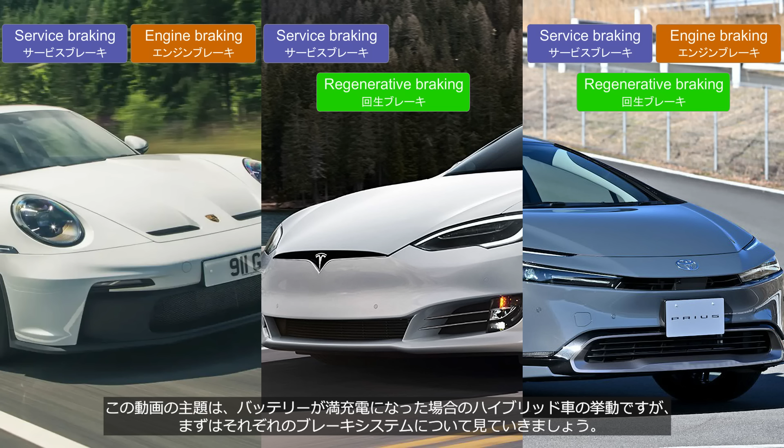The main topic of this video is how a hybrid vehicle behaves when the battery becomes fully charged. But first, let's take a look at each of the braking systems.

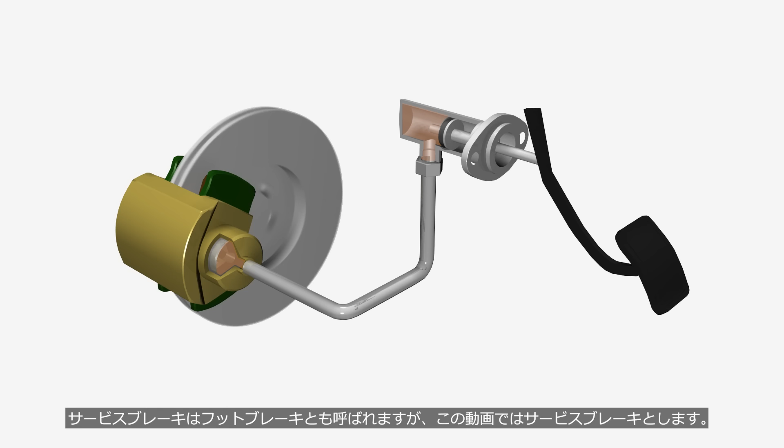The service brake is also known as the foot brake, but in this video we will refer to it as the service brake. This system converts the force applied by the driver on the brake pedal into hydraulic pressure, which then presses the brake pads against the brake discs rotating with the wheels, slowing the vehicle through friction. From a physical perspective, the kinetic energy of the moving vehicle is converted into thermal energy by the brake discs and pads, which is then dissipated into the atmosphere. In other words, the vehicle slows down by discarding the energy it gained from burning fuel to accelerate.

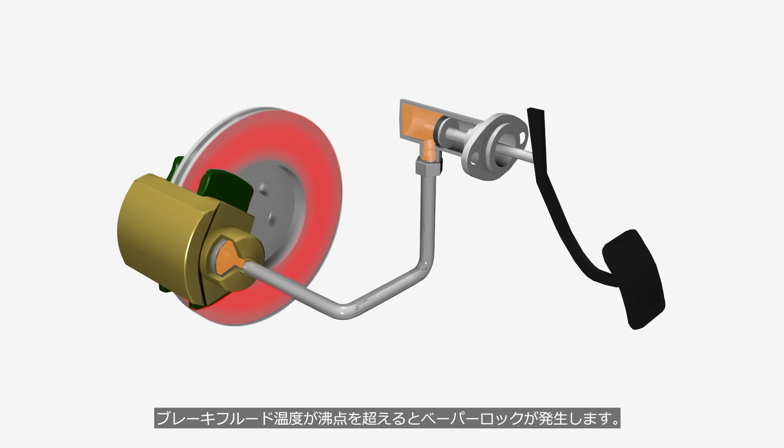The driver can easily control the braking force by changing the pressure on the brake pedal. One of the main issues with the service brake is the buildup of excessive heat. When the brake pad temperature exceeds 300 degrees Celsius, brake fade may occur. When the brake fluid temperature exceeds its boiling point, vapor lock can occur.

Brake fade is a phenomenon in which overheating of the brake pads causes some of the material on the pad surface to vaporize, forming a gas layer that reduces the coefficient of friction and weakens braking performance.

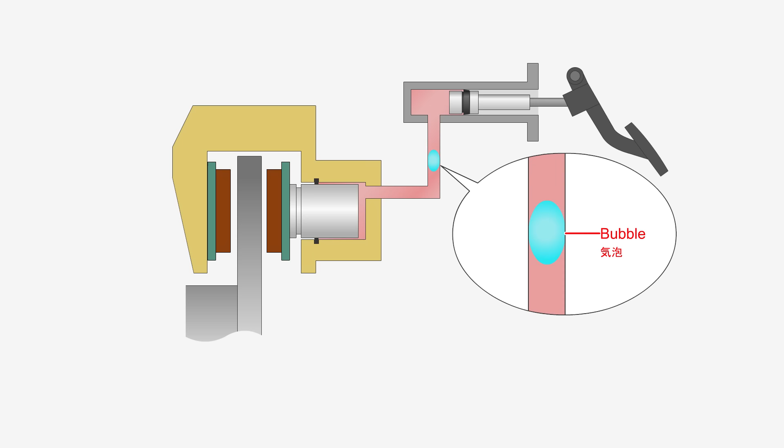Vapor lock is a phenomenon where heat is transferred to the brake fluid, causing it to reach its boiling point and form gas bubbles within the brake lines. Liquids cannot be compressed, but gases can be compressed. As a result, the force applied by the driver on the brake pedal is not transmitted to the brake pads, and the brakes become completely ineffective.

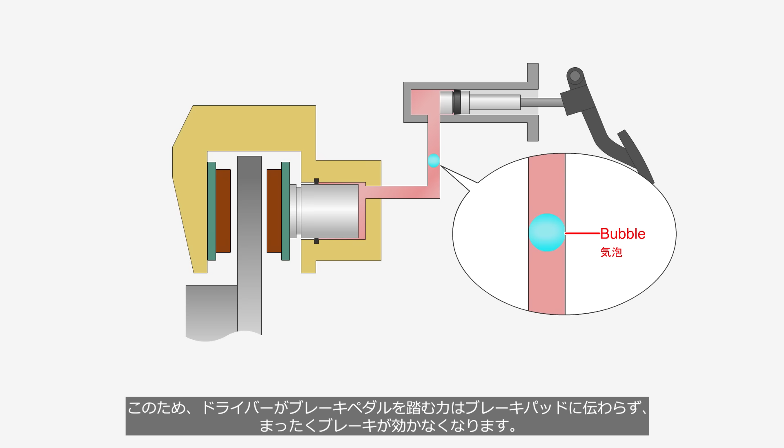For these reasons, especially when descending long mountain roads, the driver needs to be cautious to prevent the brakes from overheating.

Simply put, engine braking consumes the vehicle's energy by making the engine operate as an air pump. Engine operation is divided into the intake stroke, compression stroke, power stroke, and exhaust stroke. When the throttle valve is closed during the intake stroke, a large amount of energy is required because the engine must draw air through a narrow passage.

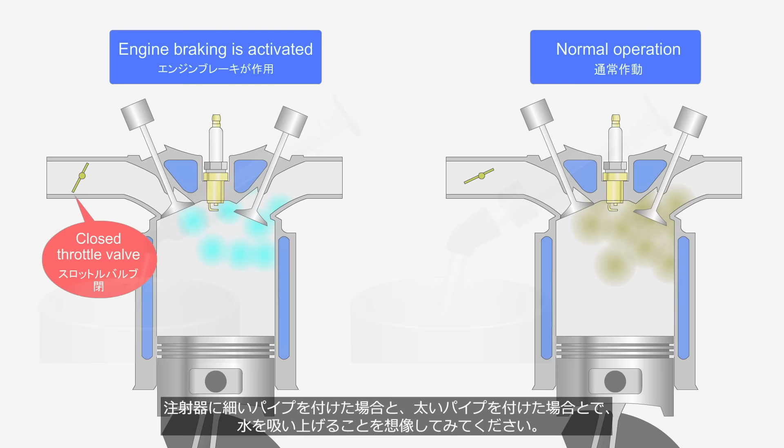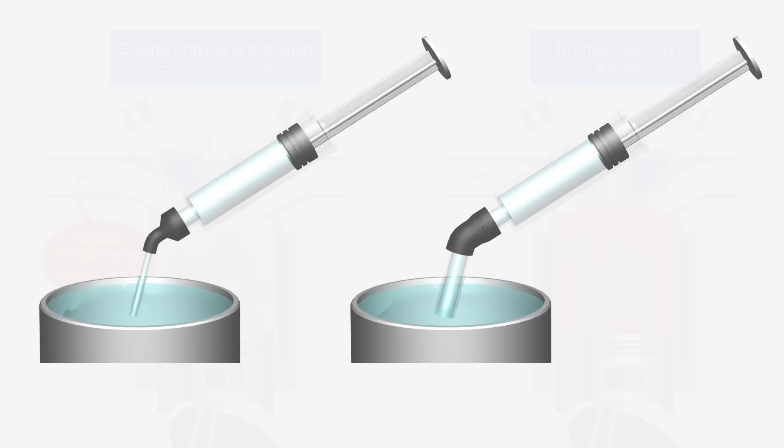Imagine trying to draw water with a syringe, once with a thin tube attached and once with a thick tube - the thin tube requires greater force. As a simple calculation, a 2.0 liter four-cylinder engine running at 3,000 revolutions per minute requires each cylinder to draw in 500 cc of air in just 0.01 seconds. This requires considerable energy, and engine braking uses that energy to slow the vehicle down.

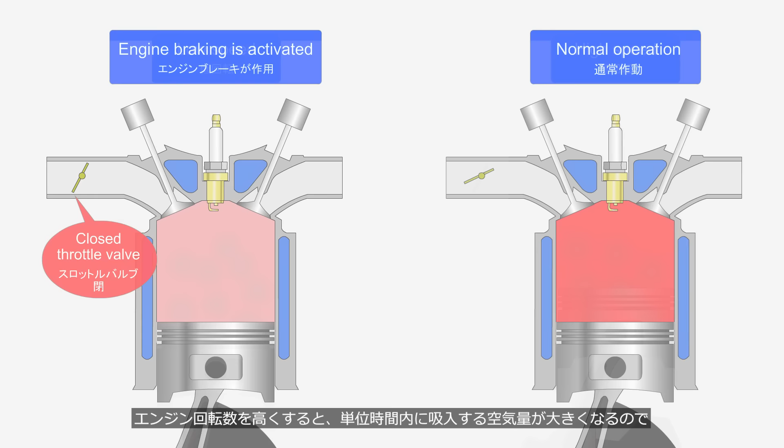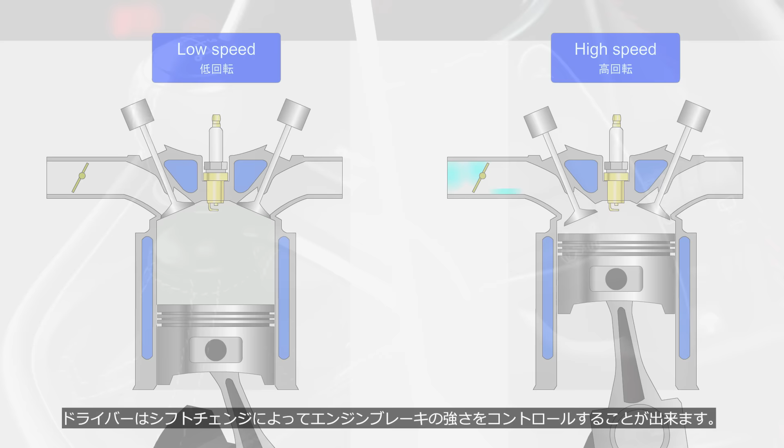When engine speed is increased, more air is drawn in per unit of time, which requires more energy and results in stronger engine braking. For this reason, the driver can control the strength of engine braking by shifting gears. However, since it merely moves air from around the air cleaner inlet to the exhaust outlet, it doesn't generate anything.

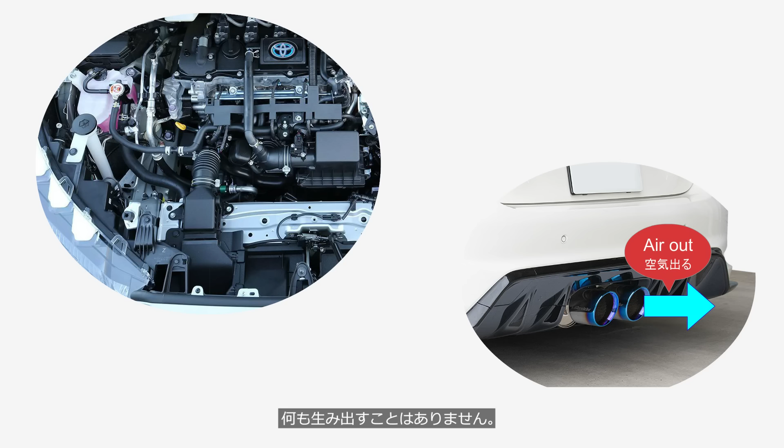The regenerative braking used in electrified vehicles, including battery EVs and hybrid vehicles, is highly efficient in terms of energy utilization. An electric motor generates rotational force when electricity is supplied to it.

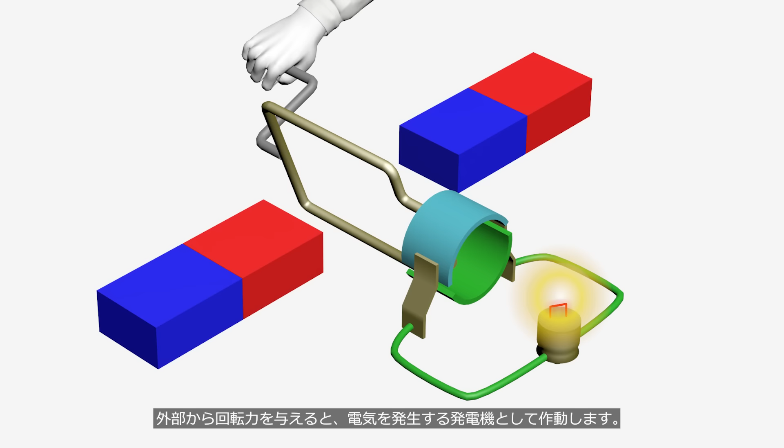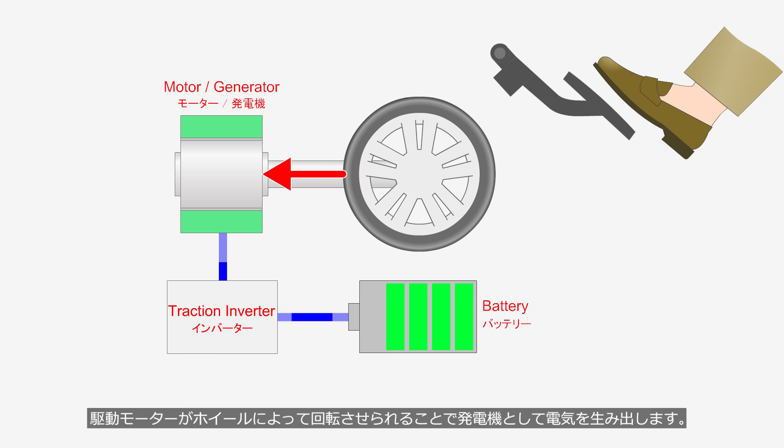When rotational force is applied to it from an external source, it functions as a generator that produces electricity. In electrified vehicles, the drive motor rotates the wheels using electricity either stored in the battery or generated by the generator during driving. When the driver releases the accelerator pedal or depresses the brake pedal, the drive motor is rotated by the wheels and functions as a generator to produce electricity.

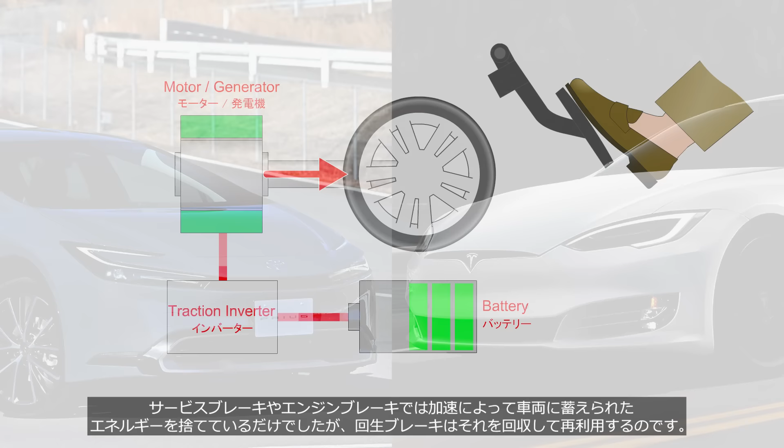The electricity is stored in the battery and used to power the drive motor during acceleration. While service braking and engine braking simply discard the energy stored in the vehicle during acceleration, regenerative braking recovers that energy and reuses it. For this reason, regenerative braking helps extend the driving range in battery EVs and improves fuel efficiency in hybrid vehicles.

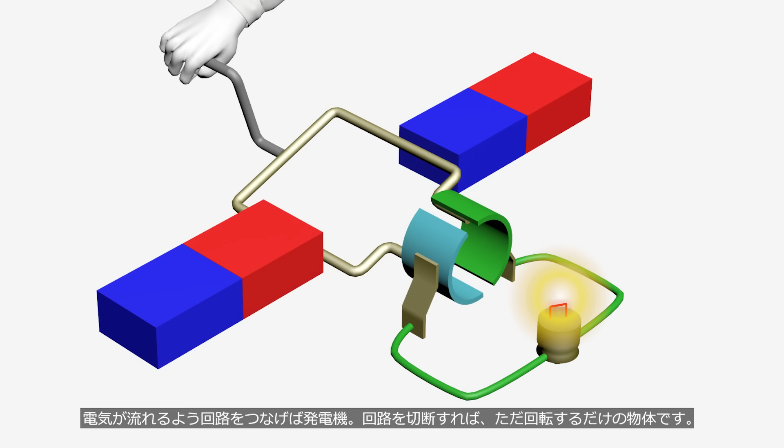For an electric motor to operate as a generator, electricity must flow through the motor. If the circuit is closed to allow electricity to flow, it acts as a generator. If the circuit is broken, it's just a rotating object.

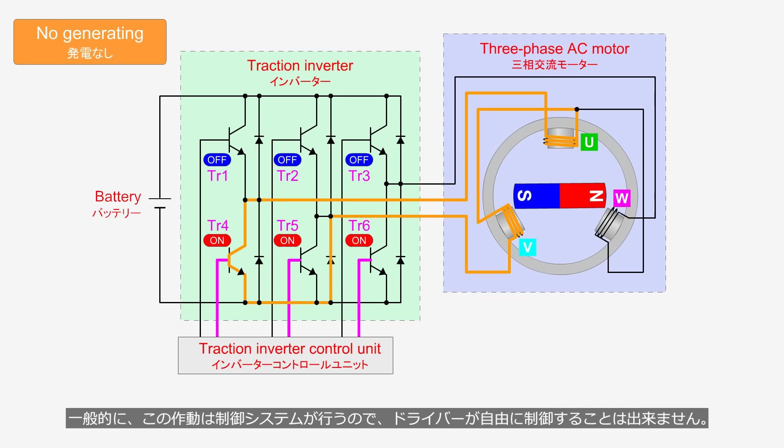In electrified vehicles, the traction inverter controls the electricity flowing to the motor to adjust the braking force. Generally, this is handled by the power unit control system, so the driver cannot control it freely. However, some models are equipped with a feature that allows the driver to adjust the strength of regenerative braking using paddle levers located behind the steering wheel.

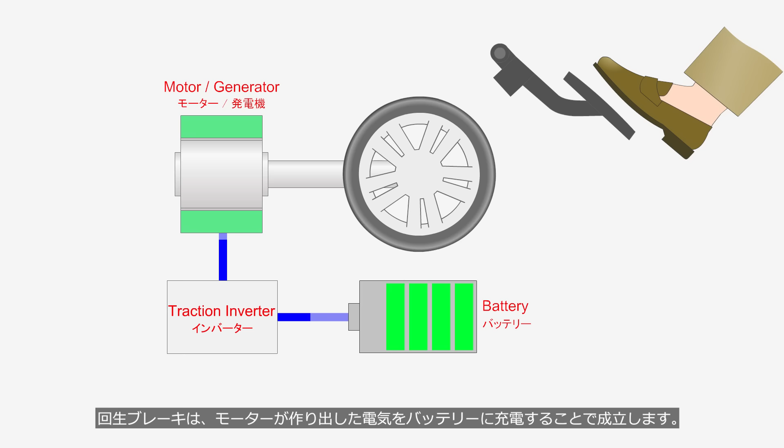There is a problem. Regenerative braking works by charging the battery with the electricity generated by the motor. What happens if the battery becomes fully charged? In hybrid vehicles equipped with only a small capacity battery, this situation can occur when driving down a long mountain road, for example. At such times, the power unit control system uses engine braking.

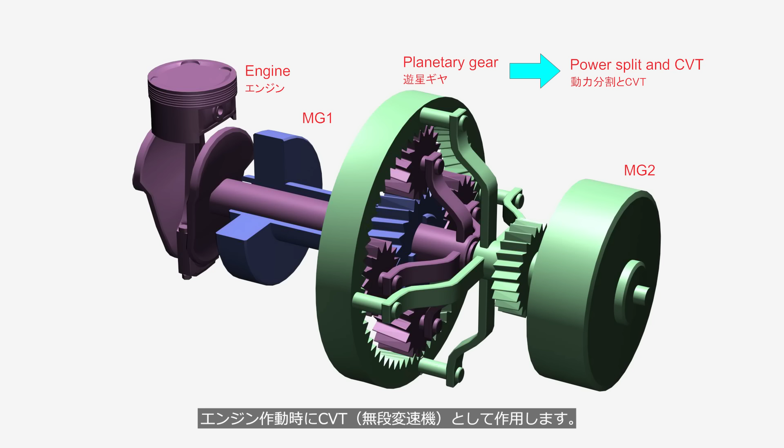Let's start by taking a look at how Toyota's power split hybrid system works. Depending on the market, it's called Synergy Drive or THS2, but essentially, it's the hybrid system used in the Prius. This system consists of an engine, a planetary gear set, motor generator 1, primarily responsible for generating electricity, called MG1, and MG2, mainly responsible for driving the wheels. The planetary gear set serves to split and combine the driving force from the engine and two motors, and also functions as a CVT, continuously variable transmission, when the engine is driving the vehicle.

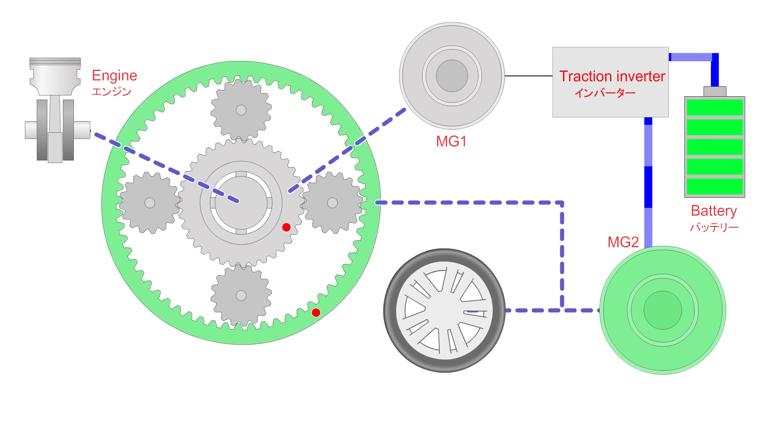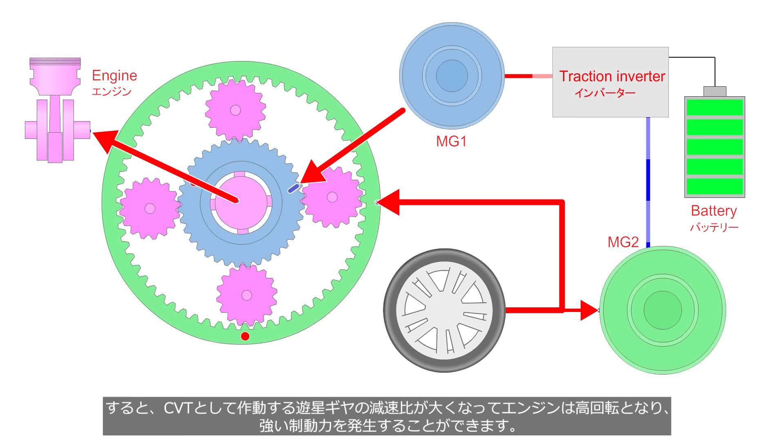When the battery becomes fully charged, MG2 operates as a generator, and the electricity it produces is used to run MG1 as a motor. As a result, the reduction ratio of the planetary gear set, which functions as a CVT, increases, causing the engine to rotate at high speed and generate strong braking force.

When driving down a long mountain road, the control system automatically starts the engine once the battery becomes fully charged. Since only the sound of the motor had been heard until then, drivers who aren't well versed in the system may be surprised when the engine suddenly starts running.

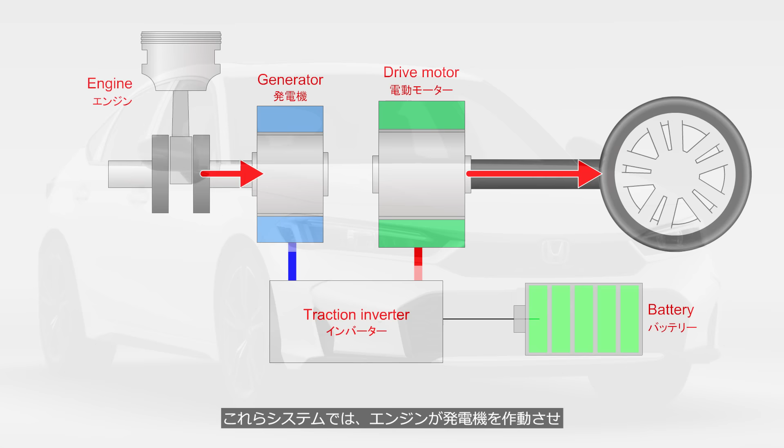Honda and Nissan have adopted series hybrid systems. In these systems, the engine operates a generator, and the generated electricity powers a drive motor that drives the wheels. Therefore, the engine and the wheels are not mechanically connected.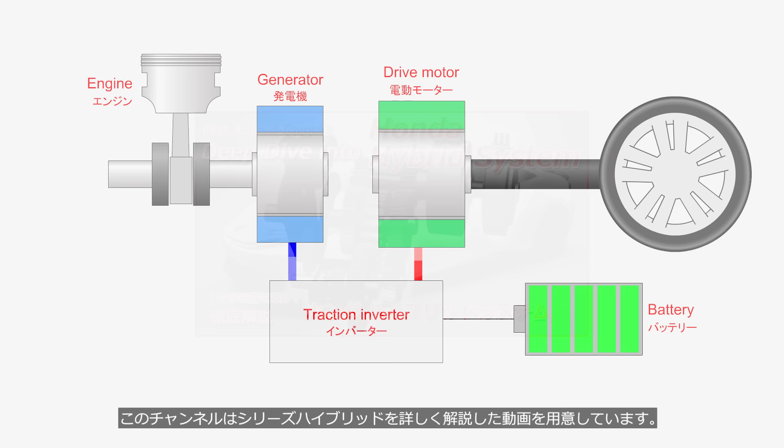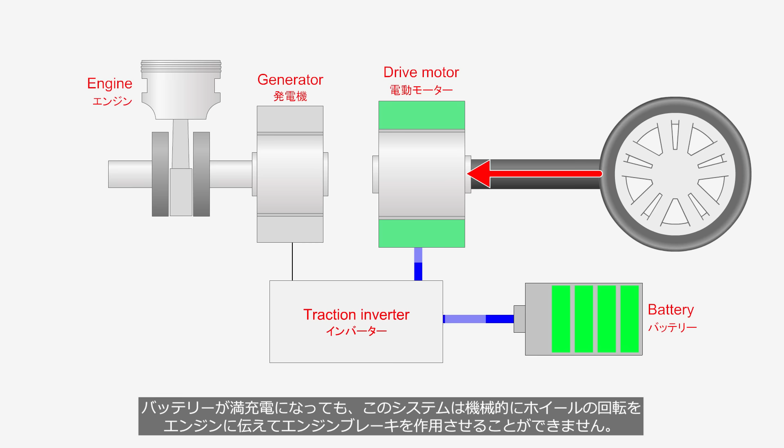When regenerative braking is active, the drive motor functions as a generator, charging the battery and providing braking force. Even when the battery is fully charged, this system cannot mechanically transmit the rotation of the wheels to the engine to apply engine braking. Honda's system includes a mechanism that directly connects the engine to the wheels during constant speed driving on highways, but in the case of the Civic, the reduction ratio is 0.805.

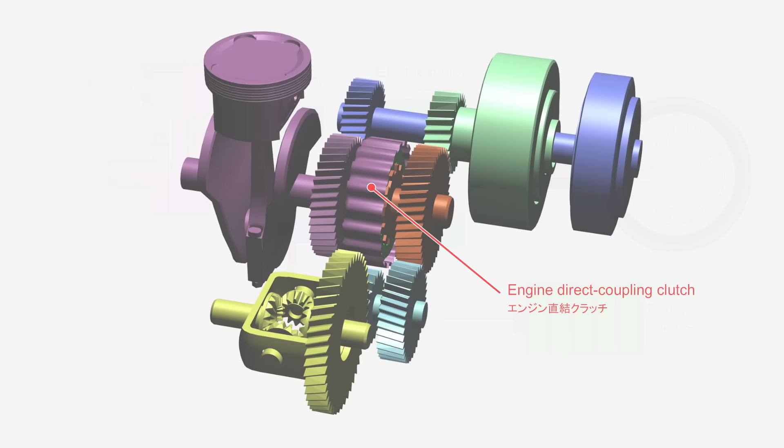The gear ratio is optimized for highway cruising in top gear, and is not appropriate for descending mountain roads. Therefore, in a series hybrid, the generator operates as a motor to rotate the engine, consuming electricity. This is a bit complicated.

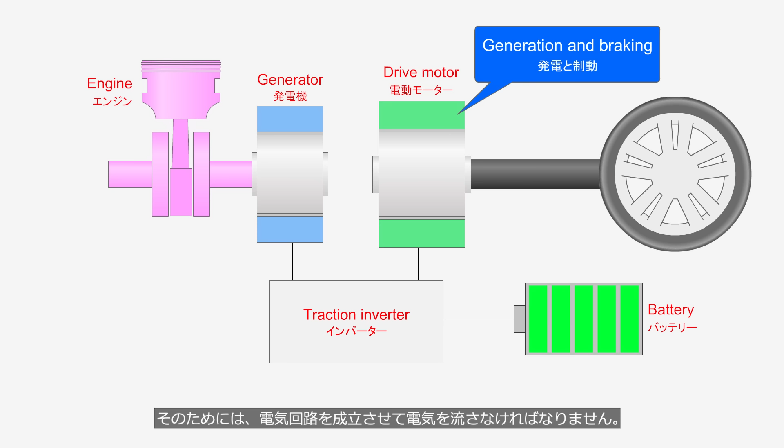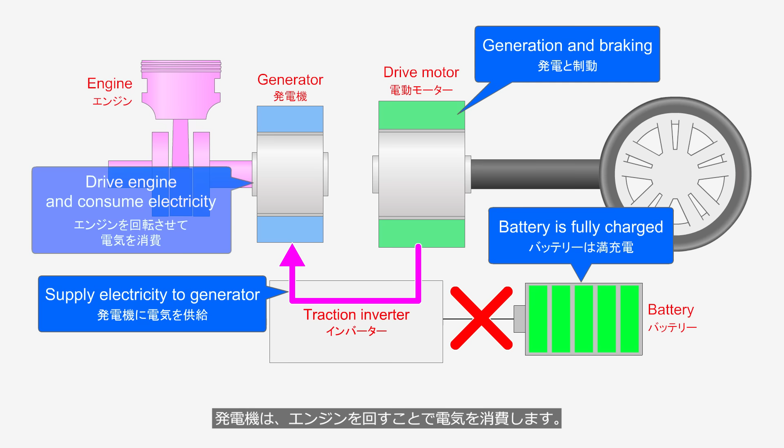Let's break it down. The braking force is generated by the drive motor operating as a generator. In order for that to happen, the electrical circuit must be closed to enable current flow. However, the battery can no longer be charged. Therefore, the generated electricity is supplied to the generator operating as a motor. The generator consumes electricity to drive the engine.

I believe you now understand that hybrid vehicles have three types of braking systems: the service brake, regenerative braking when the battery is not fully charged, and engine braking when the battery is fully charged. A question comes to mind.

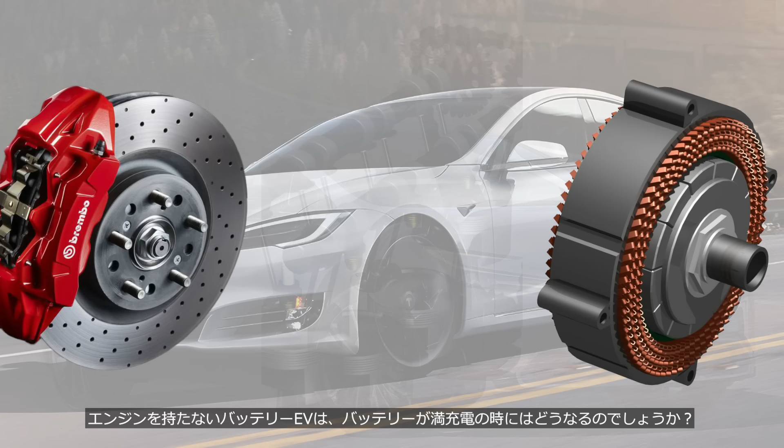What happens with battery EVs that don't have an engine when the battery is fully charged? When going down a long mountain road, relying solely on the service brakes without using regenerative or engine braking can lead to the risk of brake fade or vapor lock. You can rest assured.

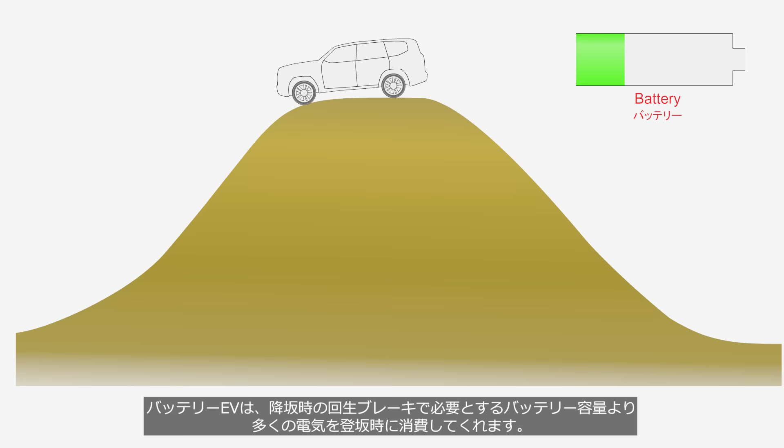Before you go down a mountain road, you first have to climb it. Battery EVs consume more electricity when climbing than the battery capacity needed for regenerative braking when descending. But what if your home, equipped with a charging station, were located at the top of the mountain road? It might be wise to avoid charging to 100% before going out.